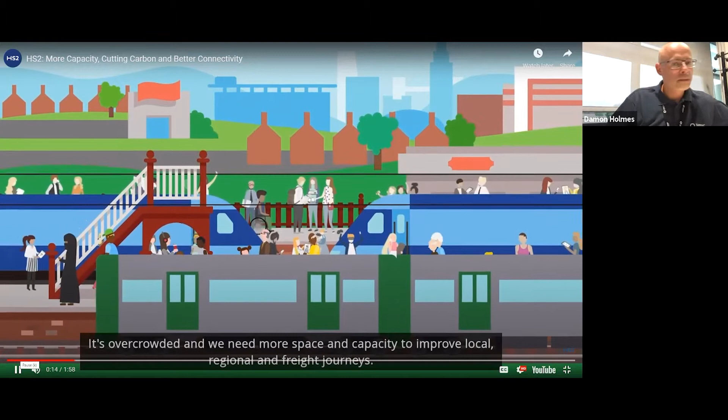Most of Britain's railway network was built over 100 years ago. The same network is still used today and was never designed to run as many services as it does. It's overcrowded, and we need more space and capacity to improve local, regional and freight journeys.

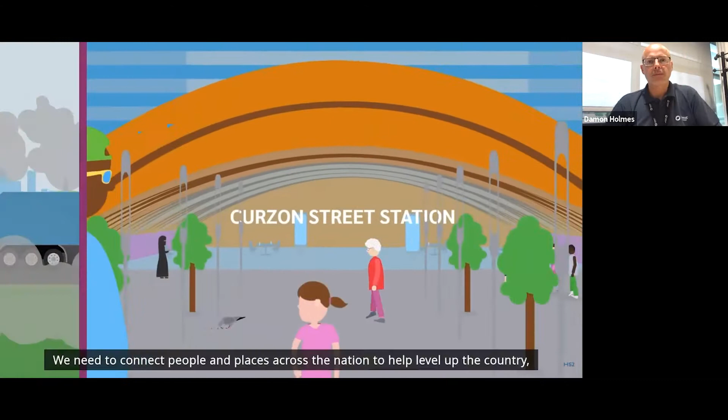Cars, lorries and planes have a huge impact on climate change. We need a cleaner, greener mode of transport in line with Britain's commitment to become net zero by 2050. We need to connect people and places across the nation to help level up the country, boost local economies and provide more opportunities for millions of people.

HS2 will revolutionise the way we travel, addressing these three key problems. When completed, 345 miles of brand new high-speed track will run between Birmingham, Manchester, Leeds and London, joining up the UK's major cities, connecting 30 million people.

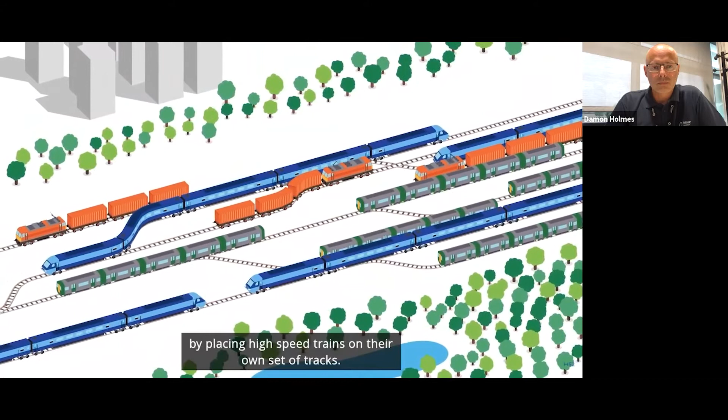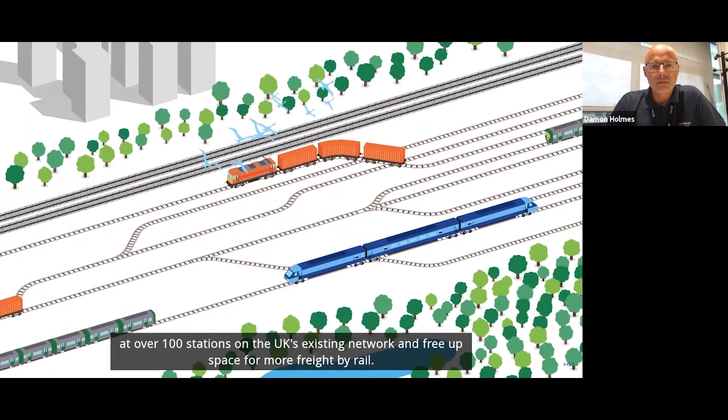The new railway will add vital capacity to our overcrowded rail network by placing high-speed trains on their own set of tracks. This will create thousands of extra seats for more commuter services at over 100 stations on the UK's existing network and free up space for more freight by rail.

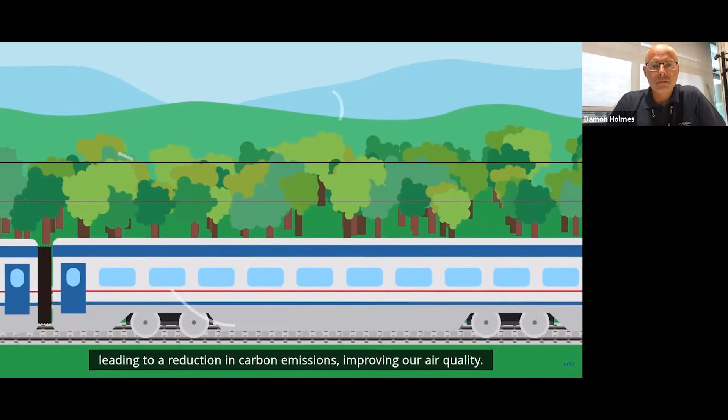HS2 will take cars and lorries off the road while reducing the need for domestic air travel, leading to a reduction in carbon emissions, improving our air quality. Bringing the nation closer together will boost growth, create new jobs and open up leisure opportunities for millions of people.

HS2: more capacity, cutting carbon and better connectivity.

A lot of people think the reason HS2 is being built is because it'll get you from Birmingham to London 10 minutes quicker, and it's a real misconception. It's about what that video's just said: it's about taking vehicles off the road, and it's about freeing up the network for more passenger and commuter rail. So it's a popular misconception that it's just about the speed of it.

So you see on the screen there the whole route. Today's presentation is really going to concentrate on phase one, which is the London to Birmingham section. I'll talk through the different sections there. You can see 4 stations as well, at Old Oak Common, Euston, Interchange and Curzon Street.

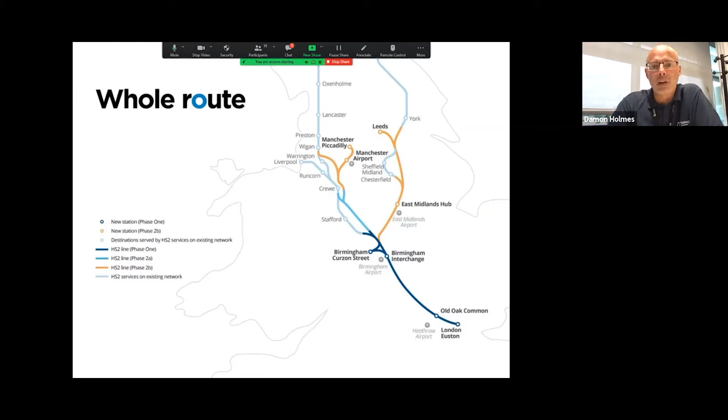So what's the latest? Well, on phase 1, February 2017, royal assent was granted. The main work started early last year, and the current plan, which is interesting, is an expected opening of 2029 to 2033. So that could be, at this point in time, up to a 7-year delay. You can imagine in 5, 6, 7 years' time, you do wonder what that date is going to be.

Phase 2A, royal assent was granted earlier this year. Main works are due to start in 2022, and they've just started letting some of the packages there, which I'll walk through again in a bit more detail further in the presentation. But again, that's got an expected opening at the same time as phase 1.

And then phase 2B, which is those legs up to Wigan, Manchester, through the Eastern Hub, East Midlands Hub up to Leeds, are under consultation at the moment. There's been 3 or 4 rounds of consultation, and there's a lot of speculation in the news of whether phase 2B will happen or not, whether the Leeds leg will happen, whether the Manchester leg will happen. And sat here now, I have no idea if that will go ahead or not. Read what you like through the press at this moment in time. But there's not a lot of activity from a Tarmac perspective, or from a construction perspective and supply chain perspective, on phase 2B at this point in time.

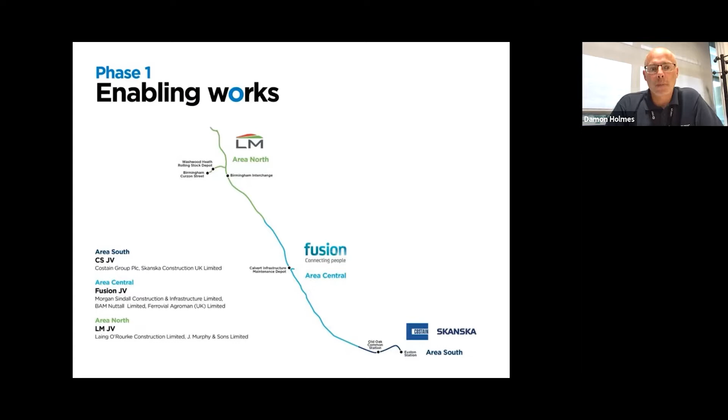The next phase is the main works, the real construction activity. That's the building of the tunnels, the viaducts, the bridges, the cuttings, the real high value stuff where the majority of the construction materials that the likes of Tarmac, Hanson, Cemex, AI, Breedon, etc. will supply onto this scheme.

And they're split into seven different sections. Starting out of London, you've got Skanska, Costain, Strabag doing the S1 and S2 section. They're predominantly tunnels, with 95% of that route as twin bore tunnels coming out of London.

You then get into the C1 section, so Align is VolkerFitzpatrick, Bouygues and Sir Robert McAlpine. They're building a 16-kilometre tunnel and a 3.5-kilometre viaduct over the Chilterns.

You're then into the Eiffage Kier Ferrovial BAM section. That was originally Carillion Eiffage Kier, then it went to Eiffage Kier with the demise of Carillion, and now it's Eiffage Kier Ferrovial BAM. So a lot of rebranding there for section C2 and C3. There's a couple of green tunnels on their section, but more standard construction.

Then in N1 and N2 up into Birmingham, you've got the Balfour Beatty Vinci joint venture building that section. Again there's a couple of tunnels there - a Bromford tunnel just coming into Birmingham, and the Long Itchington Wood tunnel just to the south of their section. So that's the main works packages.

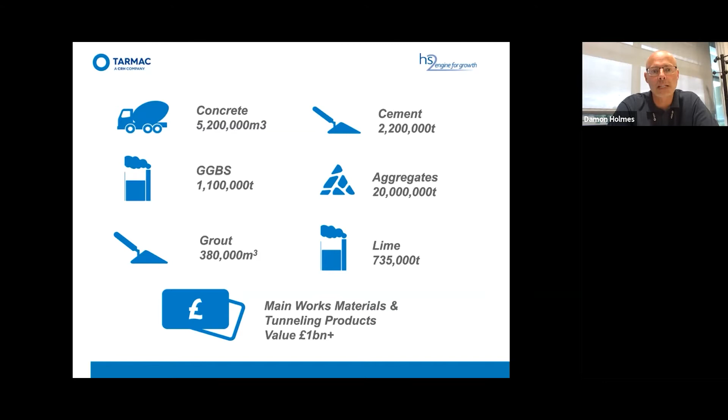So there are some huge value contracts in play on this scheme, and opportunities for the supply chain, not just for large businesses like Tarmac, Hanson, AI Breedon and Cemex etc., but for a lot of independents and small and medium enterprises as well.

I'm going to go through some of those and give you an idea of the types of materials and their applications. Starting with aggregates, there's a huge requirement of around 16 million tonnes for Balfour Beatty Vinci and Eiffage Kier Ferrovial BAM for the fill aggregates on their sections - that's the northerly sections C2, C3, N1, N2.

A lot of that's been done through GRS Roadstone and a special purpose vehicle set up at Railstone Solutions, a partnership between Tarmac, AI, and GRS who are the logistics provider, where we're setting up a lot of new assets. We've got an agreement with Hams Hall just outside Birmingham, and we're expanding our Banbury operation.

There's new rolling stock that's been put on the rail network to accommodate all the aggregates required, because 16 million tonnes over a space of 3 to 4 years is a significant amount of material. There's also a lot of expansion happening at quarries in Derbyshire and the Midlands to make sure that material can come out of those units and get to the trace and to the HS2 routes and the contractors that need it.

In terms of ready-mix concrete, I'll show a slide in a moment that'll show you where all the different packages are along the route. From our perspective, from Tarmac, and from AI, Cemex, Hanson, and Capital Concrete in London as well, we're developing a number of on and off-site strategies. There's a lot of temporary concrete plants going up along the route. Tarmac are putting 12 brand new concrete plants along the trace - that's more concrete plants than we've got in the whole of Scotland, just to give you the scale of that.

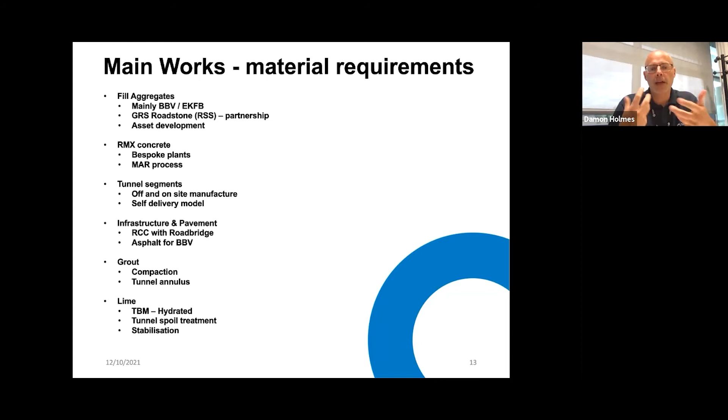Moving on to grout, there's a couple of areas there. When the ground investigation works have been carried out, there's a lot of fissures that they've been finding. They need compaction grout injecting into those to stabilize that ground - it's better than digging it out, filling it in, and compacting it. So there's opportunities there, certainly on the Align section in 2020. And then obviously with all the tunnels, there's the annulus grout that goes around the tunnel edge between the earth and the actual tunnel segments to create that seal - that's a powdered blend of cementitious material with added water. So a huge opportunity for the construction industry and those companies that produce those types of products.

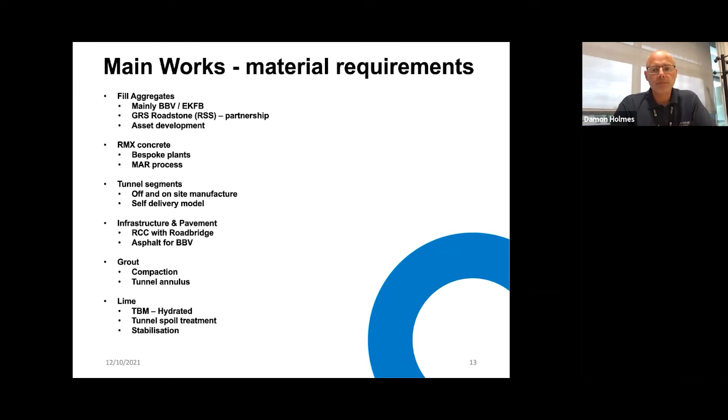And then the bottom one you've got on there is lime. Only a few producers of lime in the UK use a hydrated lime for use at the tunnel boring machine head - you use lime to treat the spoil coming out of the tunnels. A lot of that material is being placed locally, used for landscaping, so you've got to treat it with lime to get the right MCV, the right CBRs. Some of the tunnel spoil can't be placed locally because it's coming out of London, so that spoil is being moved along the Thames, similarly to what happened with Crossrail, for RSPB sanctuaries, redevelopment, quarry void filling and things like that. So a lot of materials, a lot of different end uses.

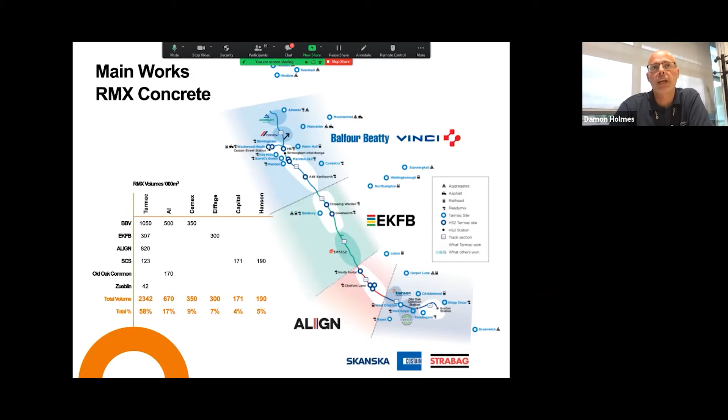So that's the building of the viaducts, the tunnels, some of the tunnel segment concrete, and you're looking at in excess of 4 million cubic meters of concrete over a 5 to 6 year spell. Remember, we're only talking about the main works of phase 1 here - we've not got into phase 2A or phase 2B.

The video I'm going to show you now is at Align's main compound. For those of you that have been on the M25 recently between junction 16 and 17, you'll see to the side around a 1.5 to 2 kilometre long compound, and it's where the tunnel boring machines launched 3 to 4 months ago. They're now a mile through - they've bored under the M25, they're boring through the Chilterns, and that's the 16 kilometre long twin bore tunnels that Align are constructing.

On that compound, they've got 3 precast factories, 2 segment precast factories. They've got a viaduct beam precast factory. They've got a slurry treatment plant, and they've got 3 concrete plants. This is a video showing a time lapse of those concrete plants being installed in 2020.

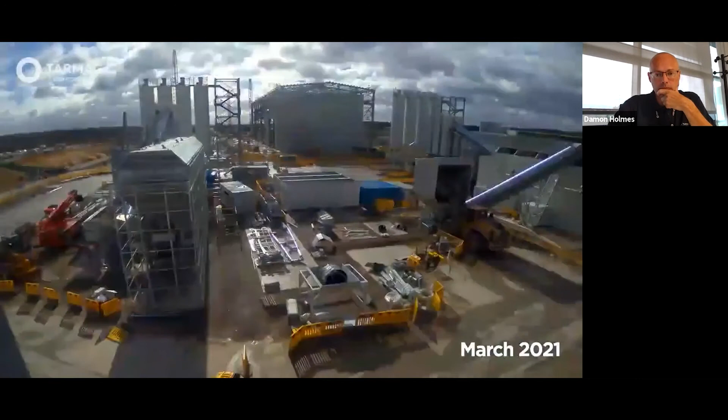I think one of the key challenges in putting those batching plants up was the interaction with all the different types of contractors that were on site, because there was so much building activity happening at that time and crossover between contractors. It was quite challenging to manage, and all that was happening in the middle of the COVID pandemic as well, so it added complexity on the build program.

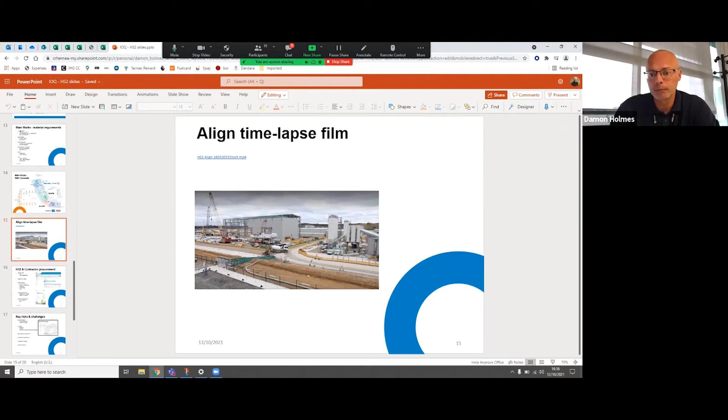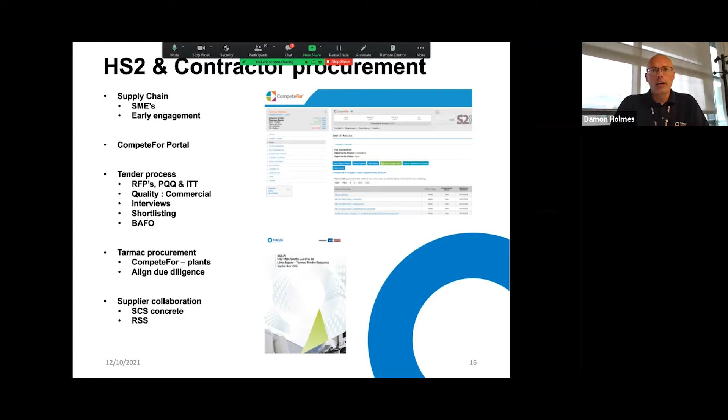Okay, I wanted to touch on HS2's approach to procurement and some of the contractor management. There's a real supply chain focus, and there's a lot around small and medium enterprises, a lot about early engagement. So, you know, we were engaged on this project right back for...

...2014, 15, and it was years before we secured any work. Similarly across our competitors and colleagues across the industry, a lot of the opportunities come through the CompeteFor portal, and that's been publicised quite widely, and that's all around fairness.

Making sure procurement teams within HS2 or within the civil contractor businesses aren't just selecting their favourite suppliers, if you will, or the traditional supply chain. It's all around fairness, and a lot of activity happens through that portal.

The tender process for some of the packages has been extremely intense. So what the likes of Balfour Beatty Vinci, who are letting a package for a couple of million cube of concrete split across 3 packages, you can imagine the intensity of the procurement process there.

They had several budgeting exercises to go through, so requests for prices were quite a big thing. Then they came out for the pre-qualification questionnaires to shortlist the supply chain, and then you were into the invitation to tender.

And traditionally what you'll see on tenders, it's all about the price. So, you know, we've got a commodity product, you could argue, and it's all about the price, but not so with HS2, to the extreme that some of the packages that came out to the market were 80% quality, 20% price.

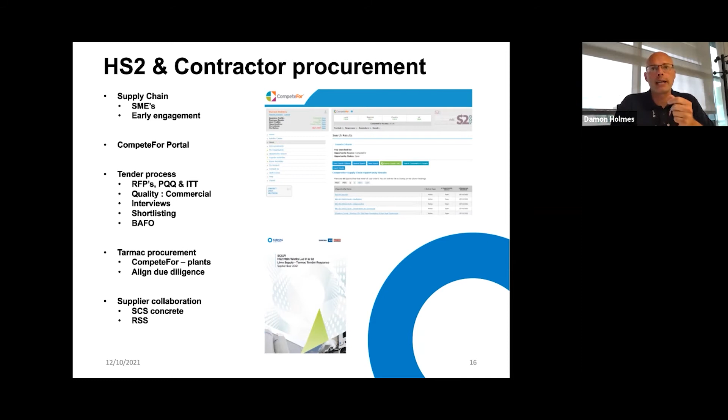Touching on some of the key risks and challenges for the project, obviously you couldn't get away from this without talking about COVID. I mentioned the plant installations - we had a lot of foreign workforce, so getting people in and out of the country with restrictions and lockdown was a challenge, and also infections. The site at Align at the South Portal didn't really stop at all, it was never shut down for any period of time. It continued, but there was quite an impact on people being affected by COVID, not being able to work, having to isolate - it had an effect on the programme.

And also remote working - we got very used to working in and out of each other's offices. I used to hot desk in Skanska's office, I used to hot desk in Bouygues' offices, just working closely as a supply chain partner, and that became remote. That was a challenge at the time, but it's something we're all used to now. The fact that we're having this call rather than having it face to face is testament to that.

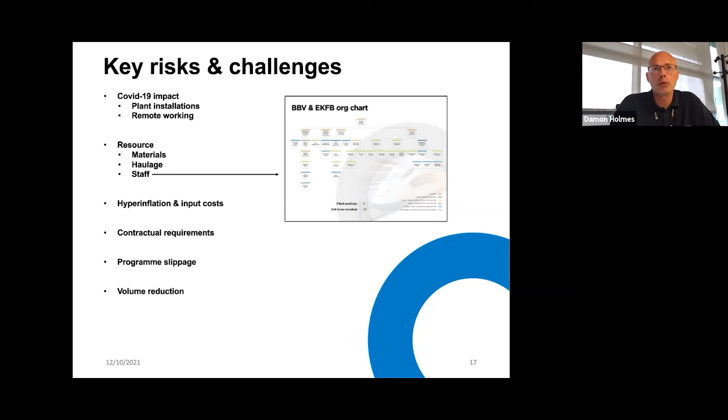From a resource perspective, materials - HS2 is having a huge pull on the industry. Certainly some of our units are maxed out at the moment, whether it's stone in the ground or volume you can actually put through the plant. There's a real challenge around making sure we balance business as usual with HS2, because the last thing we want is, after the project's finished, there's no legacy business as usual to go back to because we've affected that. So we look at it in terms of incremental volume, added volume to the business we've got at the moment.

Haulage is really biting at the moment. We know there's a backlog of something like 90,000 tests that haven't been completed. Brexit's had an impact on that as well, so we've had to look at a different strategy. We're working with third-party suppliers, and we've also got our contract haulier fleet - and I'm not just talking for Tarmac here, I'm probably talking for all of the industry when they hear about haulage and staff. You've got a screenshot there on the right-hand side.

That's actually the delivery team for Balfour Beatty Vinci and Eiffage Kier Ferrovial BAM, and that's just for the concrete, and there's 46 people. So that's 46 new roles that have been created at Tarmac just to manage two large contracts. So technical expertise has been a struggle.

That continues to be a challenge, but we've set our business up differently to accommodate and mitigate those risks. I've put hyperinflation and input costs, and we're also hearing about carbon at the moment and how we manage that. If you're looking at long-term contracts, you've got to make sure you're de-risked, not signing up to things where in 5 years your input costs have escalated and you can't pass that on to the customer. So there's a lot of conversations through the contractors up through to HS2 to make sure the supply chain's secured and sustainable enough to deliver this project successfully.

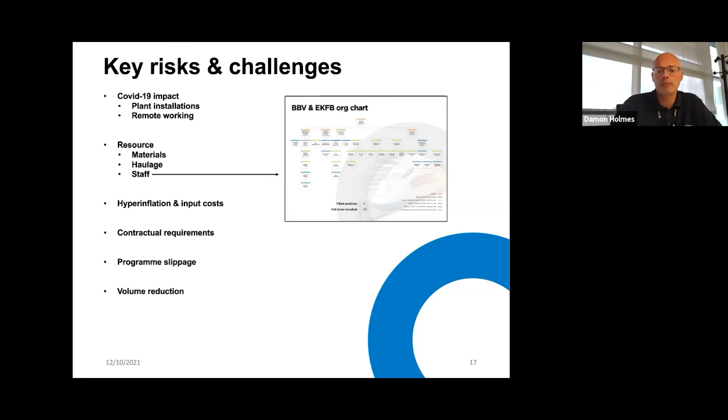Look at EDI, SEE, a huge part of the bidding process and of our everyday lives at the moment - equality, diversity, inclusion. We've been on that journey for a couple of years. If you'd mentioned that phrase 5 years ago it would have been alien to most people. We've got a different way of recruiting through our resourcing hub. We're asked to support our spend within the supply chain and the types of companies we use, and to report on what I&D training is given throughout our business and to our supply chain. From an SEE perspective, some contracts have a minimum 5% apprentices or graduates program you've got to sign up to. We're lucky to have a program within our business, but we're also making sure we're putting apprentices into operational, commercial, technical and maintenance roles across the packages being secured.

And that'll be the same across the likes of Cemex, Hanson, Capital, Breedon, AI, etc.

Look at the legacy benefits. I talked earlier about asset development - yes, some of the ready-mix plants on the scheme will come down, but the asset development at the railheads, the quarries, the receiving rail depots and some off-site concrete plants will stay in place, giving you that real asset legacy benefit, not just for Tarmac but for local communities and employment as well. You've got the skills and people development side, where you'll have people at the end of this project who started as a technician or graduate and end up in management roles. I can see it happening already with people getting promoted through the business, which is fantastic to see.

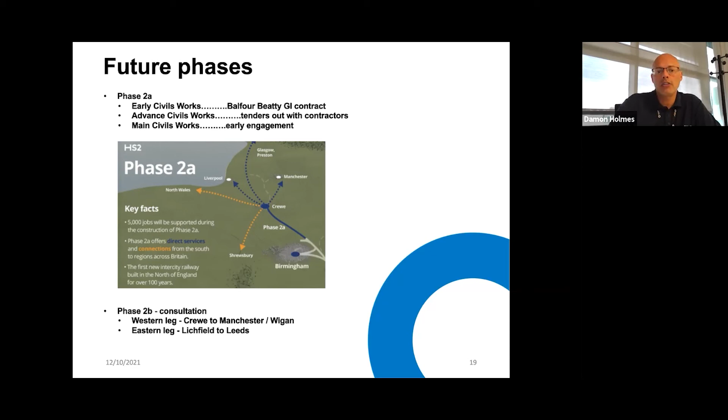So hopefully that's given you an introduction to HS2, a little bit about the construction activity on HS2 and the future phases of HS2, and you've enjoyed the presentation.

Thank you very much, Damon. One for you - is there any material being imported from offshore, apart from obviously cement because of the shortages, but is there any plans to bring aggregates in?

I can't speak for Tarmac's competitor, but I can speak for Tarmac on this one. We bring cement in from Ireland, and we bring GGBS in from Europe as well. But if you're talking about aggregates, there's no aggregates coming in. Lime could be an option coming in from our parent company CRH, Malcolm - that could be an option. But you're talking about products where there's a shortage across the industry in the UK. It's really a last resort - we want to keep it as local as possible, because the tendency with imports is extra carbon, extra cost, not beneficial to the project as a whole. But if we want to build it, we might need to do that as an industry.

Thank you. Just one other while I've got the floor - you mentioned freight. Obviously they can increase the freight on the existing lines by opening HS2, but will HS2 carry any freight? No, it's purely passenger.